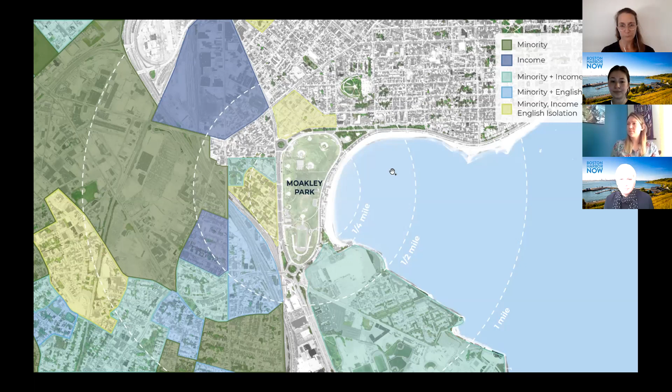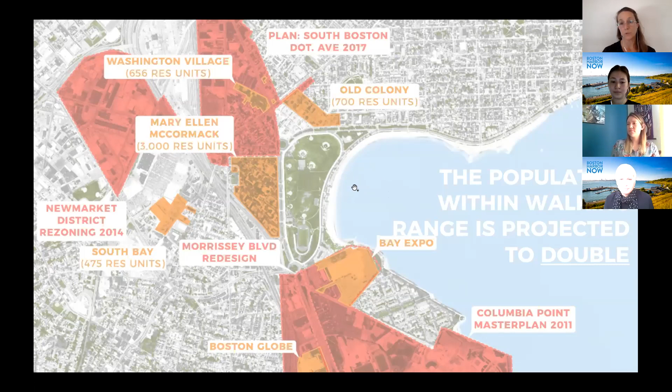In addition to this, the population surrounding Moakley Park is projected to double in the coming years as a result of a number of projects that are coming on board. So what this means is that the park itself becomes a really important future open space for all of these different populations, not only the existing population that doesn't necessarily have access to great parks, but also this increased density, which will need really great space to go to.

Equity is a really important factor as we're looking at why we are focused on Moakley as an important first step in the city of Boston's coastal flood prevention planning. Part of that has to do with those neighborhoods that I just showed you and the need for an equitable distribution of protection. In addition to that, Moakley Park is really about family and play. It's a place for communities to come together, celebrate, be with one another and get to know each other. It's about community health. Many of these neighborhoods don't necessarily have a place to engage in fitness and experience the benefits of parks, or have the ability to go to the gym or do other things that a park can offer them.

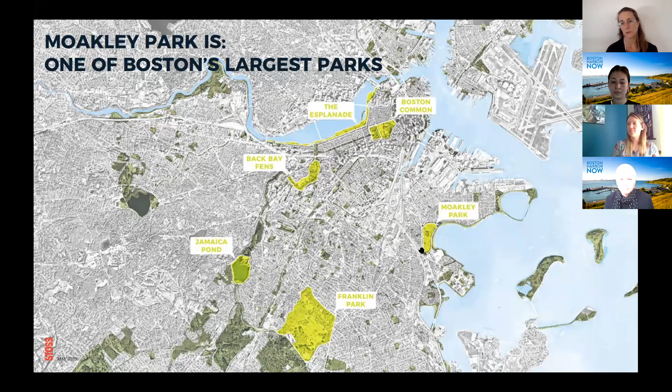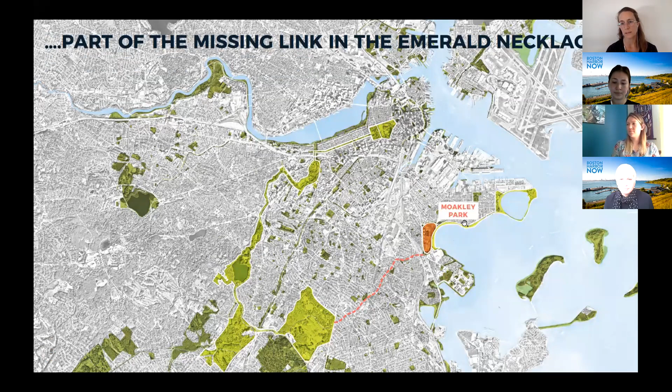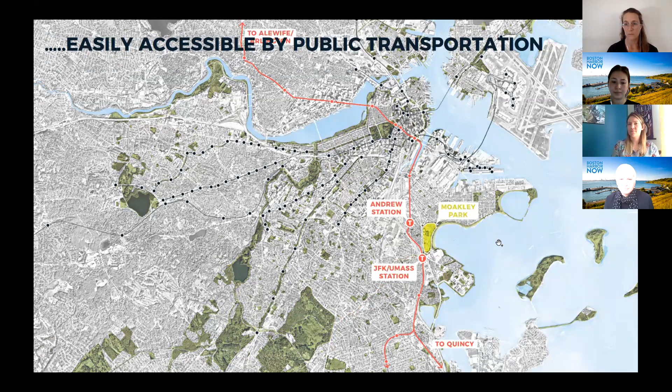So the red line is right there in a couple places, but at the same time, as you could see from that last image, while JFK Station is right there, walking from JFK Station up to Moakley Park is a relatively daunting thing to do. You have to come through K Circle, which is kind of messy for any form of transportation you might try. In addition to that, Moakley Park is isolated on either side by these 4-lane and 6-lane roadways. It's isolated from the Mary Ellen McCormack houses, which are here to the left in this image, or to the west. And it's isolated from the beach, which is right next to it, but it's difficult to know that you're right there at Moakley Park.

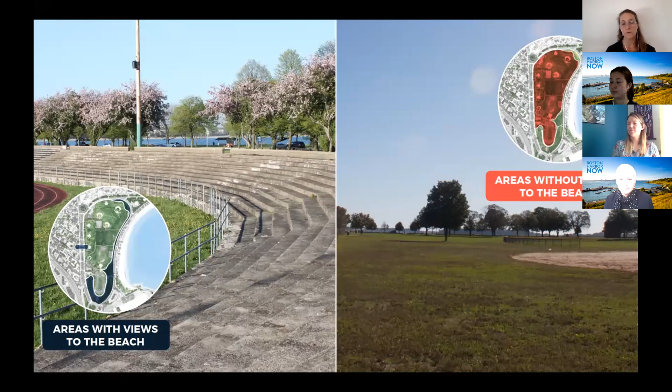As I just mentioned, there are a few places within the park where you can see that you're right there and that you're really in this gateway to the harbor. But through the majority of the park, shown in red here, you really can't see the beach, and you wouldn't really know that you're right there. So this tremendous asset of the park kind of goes missing.

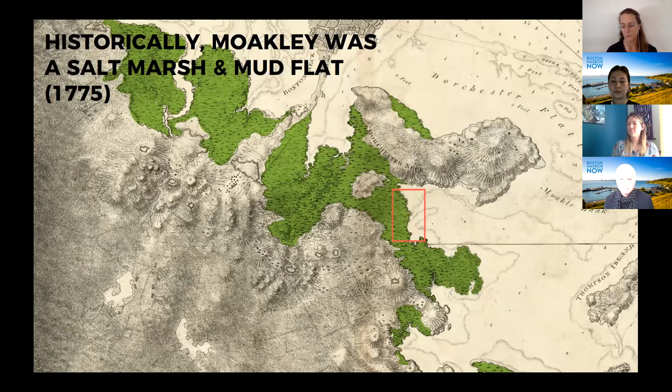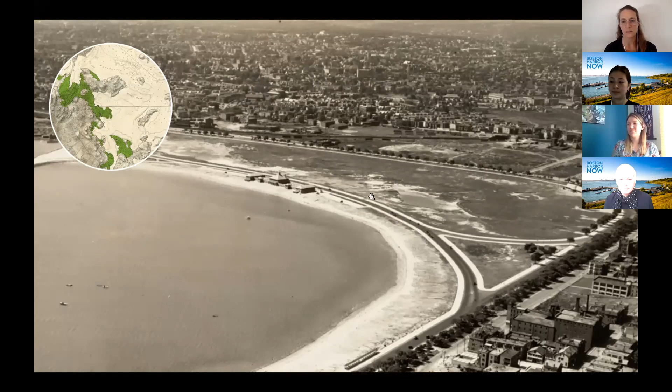Historically, Moakley was a salt marsh and a mudflat. And then in the early 1900s, it was turned into a dump and then a playground, which is generally an inadvisable sequencing of your open spaces. And then it was filled with clay and then capped with soil for the ball fields, and then eventually for the beach. What this means is that you can see today in this image, just shortly after Moakley was completed, you can kind of see the remnant of that history, right here where it's sort of the last area to get filled in.

It means that Moakley today is subject to flooding, both from high groundwater, which Julie will speak to, as well as from just stormwater. When it rains, the fields that are there flood pretty regularly. And that leads basically to a diminishing return on the program that is existing in Moakley Park. So right now, about 55% of the park is covered in sports fields, and those fields are rendered unusable when it rains. And they're flooded.

At the same time, that leaves about 43% of the park unprogrammed, really. So it's sort of space in between these fields. It's generally some lawn and some trees, and it goes sort of unused by the community. And it's really this set of conditions that led to the city of Boston in 2019 coming out with this vision for Moakley Park. So our office, in combination with One Architecture and Urbanism from New York and Nitsch Engineering, worked on this vision, which was to really create a concept for the park that would help to alleviate a number of these issues that I've just outlined.

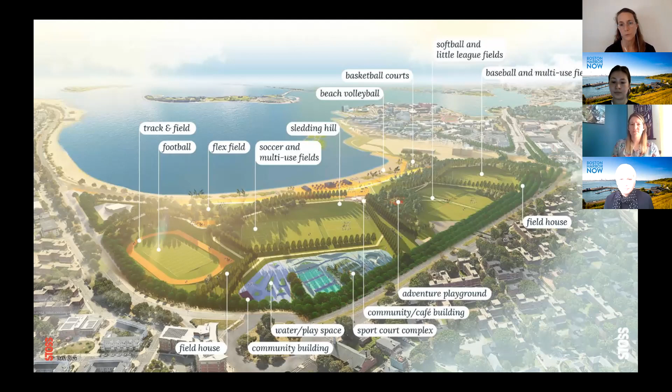It would make it more accessible, make it more inclusive, continue to improve and advance the quality of the athletic fields that are on site, and have the park act as protection against this coastal flooding that I've illustrated up front. And as well to manage some of the stormwater and generally improve the overall conditions of the park. So this is an image of the vision plan. In early 2019 we wrapped up this part of the project and put forward this plan. And we've been discussing this plan with a number of community groups.

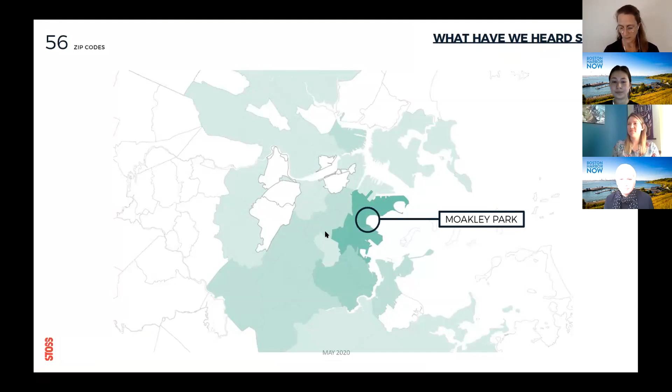What that led to was the creation of this vision plan that I showed you a minute ago. And here in plan you can see this dashed red line is a line of higher elevation where we're seeking to prevent the coastal flooding, implementing a landscaped berm that's really integrated into the park and doesn't feel so much like a wall, but really starts to be a place for new types of things to happen. And it can connect up to areas in South Boston and areas we'll hear about in a minute from Peyton, just south in Dorchester, that are raised and working to act as the protection for the city.

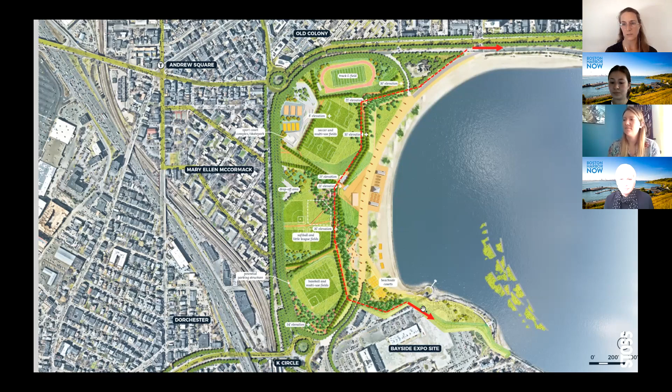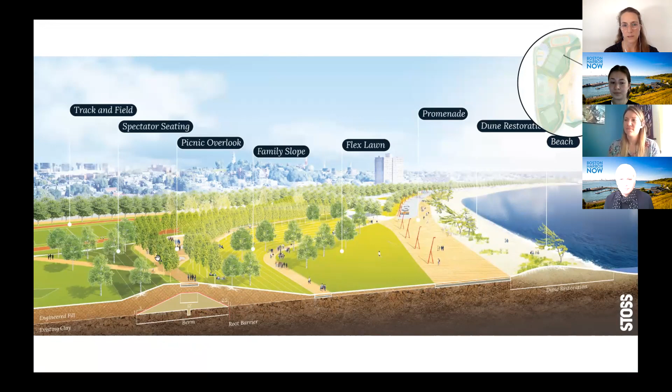This was an early idea of what that berm might look like. So you can see it here acting as a point of observation for the water, as well as an area of picnicking and things in its own right. And then when it's flooding, you can see the water coming in and being held back by that berm in a 40 inches of sea level rise on a 1% storm, which we believe to be about a 2070 timeline.

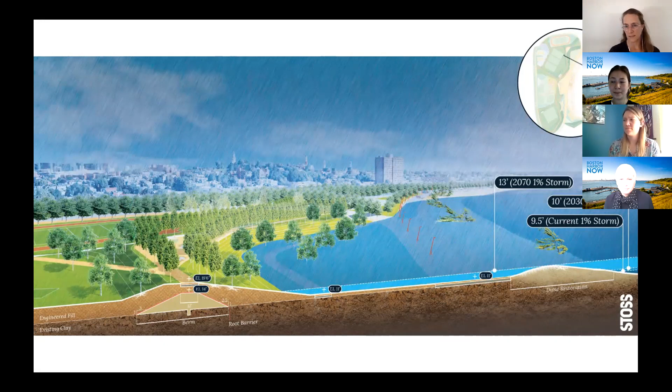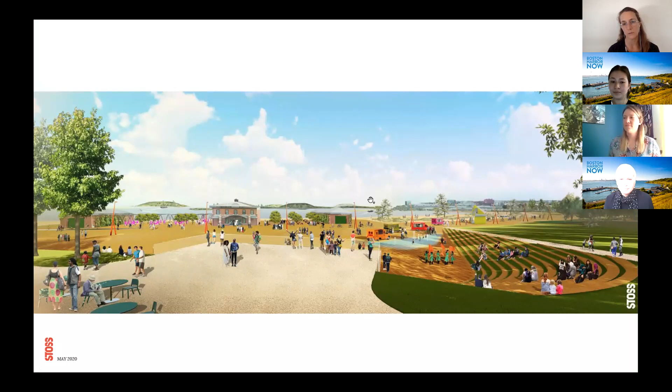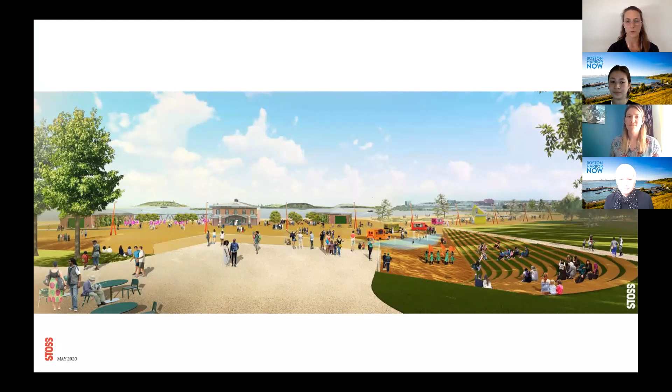You can see here again in front of this, we're sort of standing up on the top of the berm in this image and looking out over this waterfront plaza where things like events and food trucks and various things might happen. Really critical here is making that connection over to Carson Beach so people can move smoothly between the two.

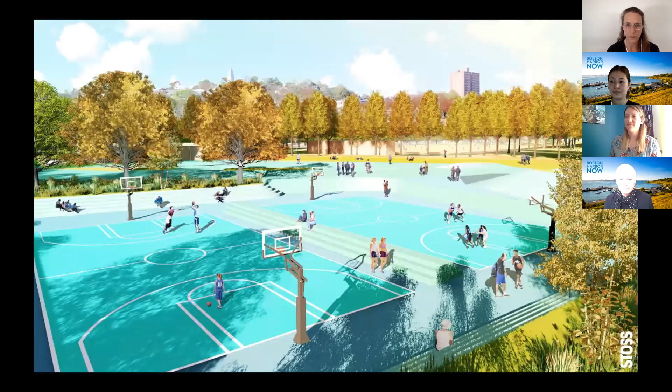And then, we're looking at implementing other forms of sport courts and that kind of thing, which not only serve as activation for different kinds of program, but could also work as flood protection from stormwater. So when it rains, these might fill up and hold excess stormwater. So all of this was the various views, a quick look basically into the vision plan, which was wrapped up.

And since we worked on the vision plan, we have been now working over about the past year with Weston and Sampson and a whole host of other engineers and designers on a refinement of this vision plan. And so I'm going to turn it over to Julie to tell you a little bit about some of the technical work that we've been doing to get more information.

Much of this vision plan was done just with community input as to what they would like to have and see in the park, but without a lot of the below ground technical information that we might need to help us really adequately locate things. So I'll give it over to Julie. Thanks, Amy.

Hi everyone, I'm Julie Eaton-Ernst with Weston and Sampson. I've had the privilege of working with STOSS for the last year on this incredible park. And so we'll talk a little bit about some of the technical considerations that have gone into the redeveloping, redesigning, advancing of this vision. So whenever we're looking at our future climate, we also like to look back to really see how climate has shaped our landscape to date.

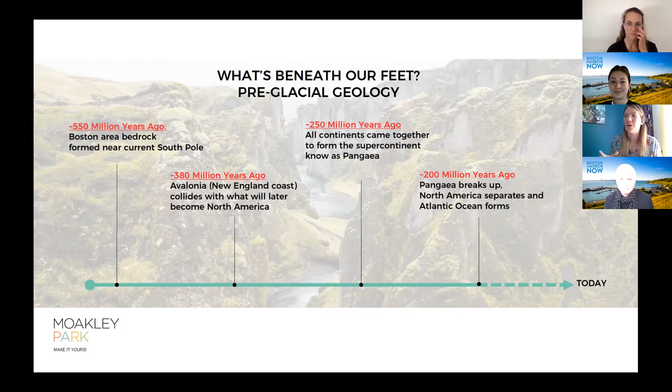So we're going to start way back when, in elementary school, you guys learned about how we were all Pangaea and the world formed and spread across. So that's sort of our pre-glacial geology, thinking about where land masses moved. Then we know that the glaciers came, and we knew the glaciers were in the Boston area, and when they left they left behind soil debris of sand, really compacted sand, gravel, and then finally deposited, clay came in. So we hear often in Boston of our Boston blue clay. So that formed in our harbor.

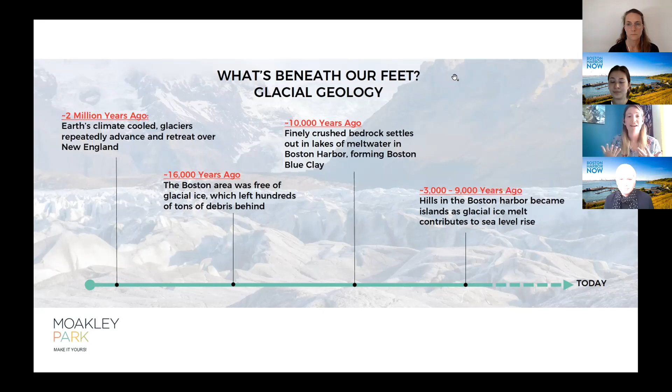And then as the glaciers melted, sea levels rose, and then we ended up with our hills being the Boston Harbor Islands, and the harbor being what we know it today. As Amy was mentioning, the area used to be a salt marsh and a mud flat, and it was filled in. So since that time of fill in the early 1900s, it's been known as a park. It used to be Columbus Park, and it was renamed to Joe Moakley Park in 2001. And that's sort of how we've known the park today.

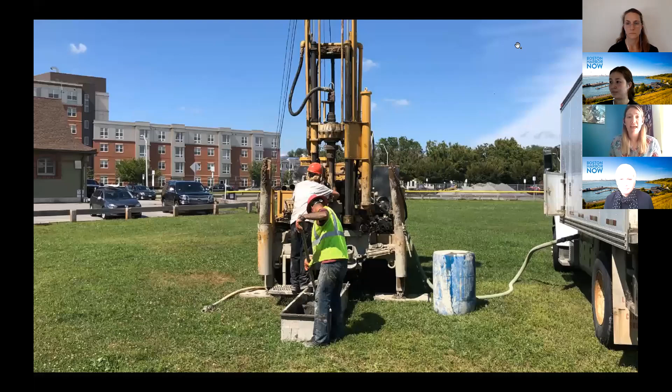So we have a great idea of what we think we're going to find on this site. We think we're going to be looking for fill materials. We know that some of it was dredged clay from the harbor. Some of it was fill from the landfill. We think because it was that mud flat, we might see organics. We're expecting to see Boston blue clay. And we're looking really for bedrock and what the quality and consistency of these materials are.

So we did a subsurface exploration program, which helped us to get little snapshots through a very large park, 62 acres, of what's below ground surface. So I'm going to ask you guys now to use your chat. And I'm curious, how deep do you think bedrock is at Moakley Park? You guys can just chat to everyone in the chat box if you have a guess. Was it 20 feet below ground surface, 40 feet, 100 feet, 400 feet? We didn't know either, which is why we did our subsurface exploration program.

Okay, we have some good guesses. We've got 20 feet, 28 feet, 70 feet, 60 feet. Any last takers? Got a 50 feet, 100 feet.

All right. Well, when we did our subsurface explorations, we found that the bedrock really varied. We saw it on the north part of the site at 67 feet, but then in the center of the site, it was over 200 feet. 224 feet was when we encountered bedrock. And then by where the stadium is, it was at 200 feet where we saw bedrock. So that was really surprising for us to see how deep the bedrock is at this site.

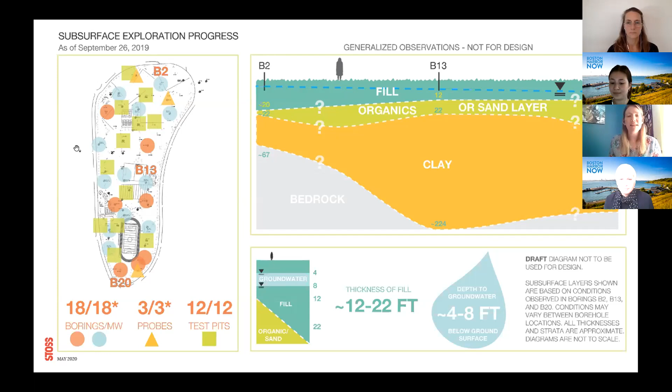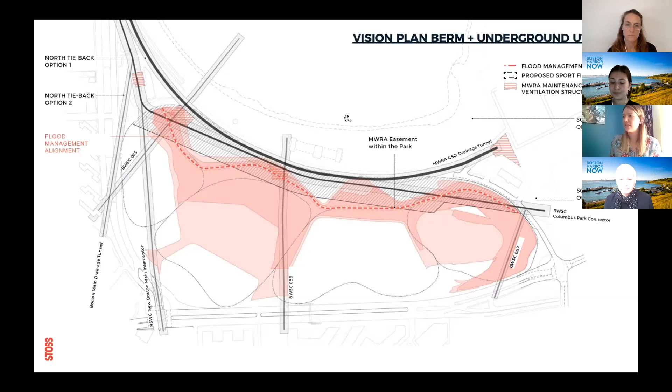So in having these investigations and understanding the utilities and what the service needs are, we were actually able to rethink how this alignment could shift back into the park and actually create more of a landscape between the barrier and the waterfront that allows for more of that open space and connection to the waterfront as well. So that was an opportunity that was realized.

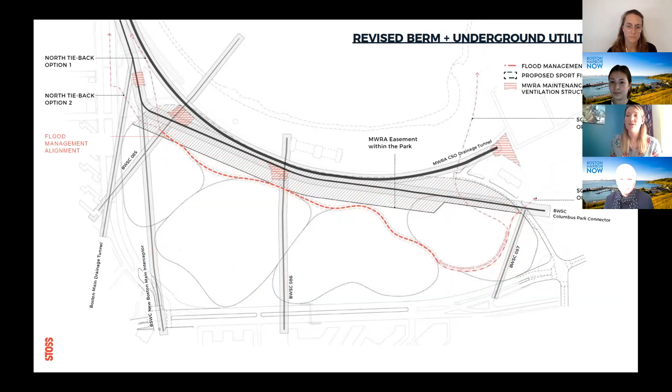We also looked at what this barrier would look like. So the original plan was to think about doing a typical earthen levee, which may have a clay core with slopes, and it looked like it was going to be about 100 feet wide with the footprint. What we realized was that by having it be entirely earthen construction, for it to go through the FEMA accreditation and Army Corps process, we couldn't have trees within 20 feet of that slope. So we would end up with these massive areas where there would be no trees.

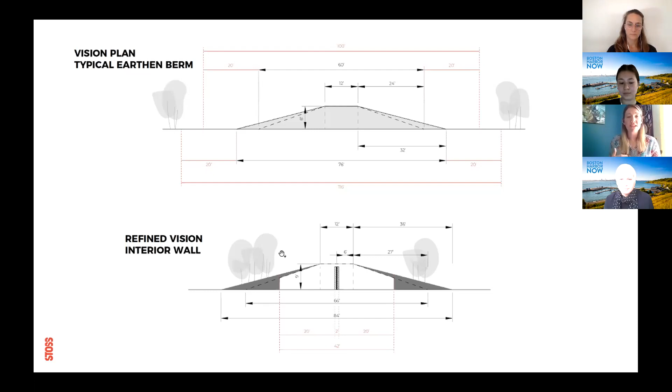So we started working with structural and geotechnical teams on, can we allow trees on the barrier? And we came up with the concept of a core wall, where the wall itself buried in the embankment is what's providing the flood protection. And then we can't have any trees within 20 feet of that wall, but it allows it to become a more vegetated slope. And also really thinking about what are the opportunities with this wall, and how the earthen form is no longer responsible for flood protection, so it can really start to take some programmatic functions and shapes. And I'll have Amy talk a little bit to some of those concepts of how we played around with the wall.

Great. So this is kind of the form of that original earthen berm and the type of program we were looking at, for the most part, adjacent to it, where we have low slopes, things where we can have spectators sitting and watching, but largely it's not that diverse in terms of what can happen along that berm.

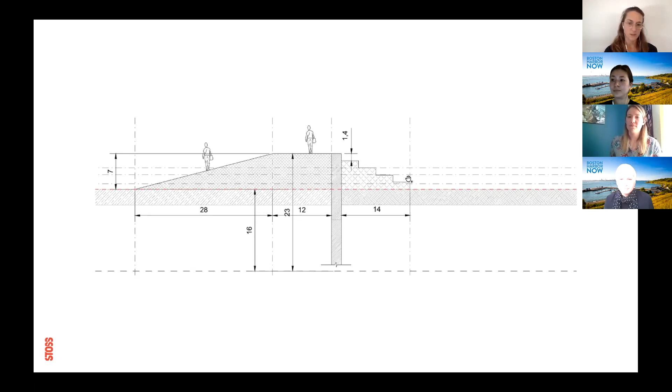Here with this new wall concept, which you can see here in the middle, we can still have that same kind of shape we had before, but we also can start to build in different types of adjacent relationships. So here we've got that berm relationship on one side, but then we might have a set of stairs, and those could be standard steps that allow someone to go down, or those could be more like stadium seating that allows us to create an amphitheater. A place to sit and watch the water.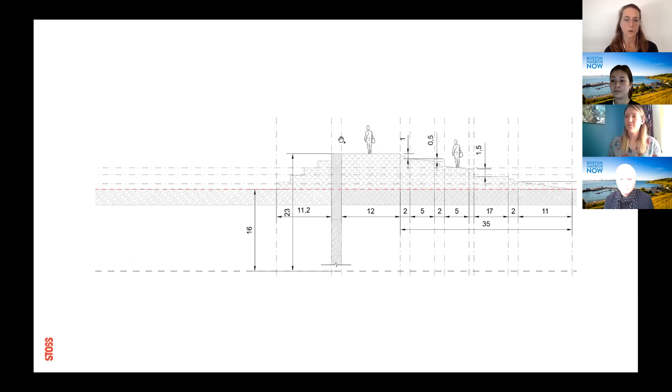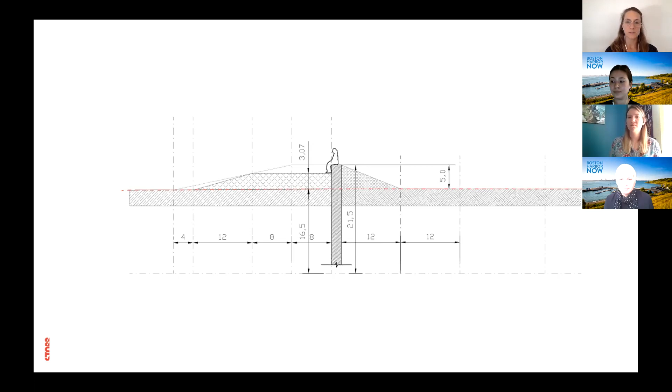Or in some places, we may even let the wall kind of peek up and express itself and become part of a seating element, either just the wall itself or something that gets built onto that wall to create a design element that both is acting as flood protection, but is also starting to let people engage with the park in new ways.

I'll just add, the benefit also of the wall is that we can design it to be added to in the future. So it allows us flexibility if needed to be able to raise the wall if we need additional height and protection in the future. And that's a benefit that we see as well in having that structural element.

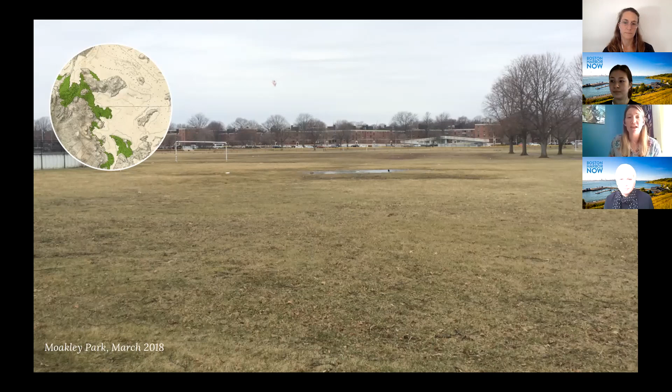The other things we've talked about, the berm being in coastal defenses, but we're also considering the stormwater, groundwater, and heat implications on the site. So as Amy mentioned, the park is wet in areas where there's high groundwater and where stormwater has trouble draining. So really working with Nitsch Engineering on selection of green infrastructure strategies to do creative stormwater management on the site, and also creating that tree canopy that will really mitigate the urban heat island effects and have a lot of improved air quality and just overall quality of life.

Great. So we are really excited to get to reveal to you a lot of the new design for the park, the updated design that accommodates all of this new information we've been learning, as well as all the great feedback we've gotten from the community over the past year. But we can't do it yet. We're going through final design in the next month or so of this stage, and then it'll go through some review, and hopefully in August or September of this year, we'll be able to have an open house.

We hope that open house can be in person in some way, to be determined as we see how things go. But we really look forward to sharing more with you all at that time and getting your input on all the great changes that have happened in the park. And then we're also looking to continue working and starting to focus in on a phase 1 that will hopefully begin design on right after that open house time.

So with that, I want to open it up for just a few minutes, maybe 5 minutes or so of questions from any of you. I know we have some Moakley Park experts in the crowd, I noticed, so no tough questions, please. But we're happy to answer any questions you might have, about the design, about the park, whatever you might be interested in. I think probably chat is the best way to do that. Yeah, Lily? So just drop your question in the chat box if you've got one. Looks like we might be fresh out. Okay, great.

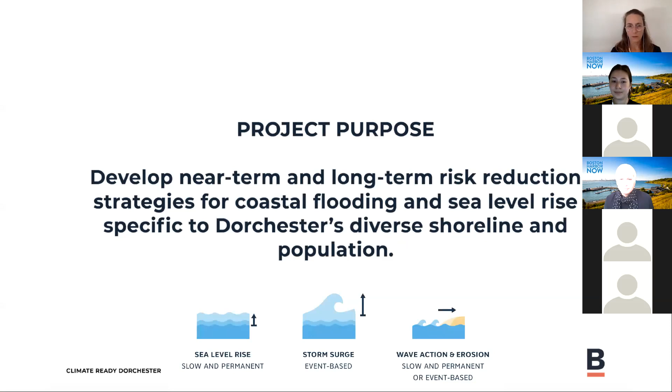So in addition to the really critically important and central resilience goals, we're also thinking about other citywide goals. So how do we enhance access to mobility, promote health of ecosystems in the neighborhood, and really define the identity of the coastline through the neighborhood. We've come to think of this as the Dorchester Shoreway.

Next slide. So you can see here the project area as a whole, obviously the entire neighborhood. And then on the east side, you can kind of see where we expect to see flooding over time. So where we see flooding today and where we expect to see flooding in 2070. Next slide.

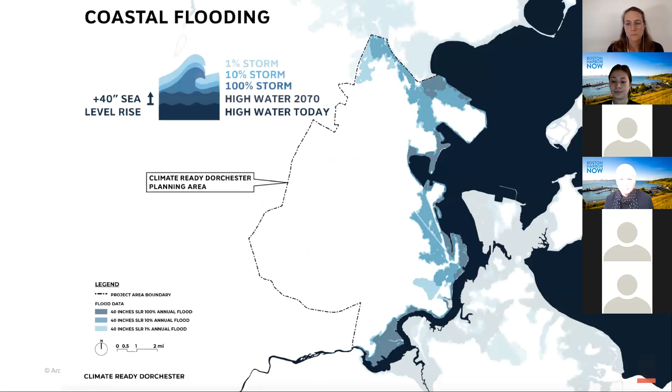So as Amy mentioned, one of the key flood inundation pathways into the neighborhood is right along the southern edge of the Moakley Park project. So we called it the Bayside Pathway. And another critical flood pathway into the neighborhood is the North Morrissey pathway. So I'm going to briefly touch on our proposed design solutions for both of those pathways.

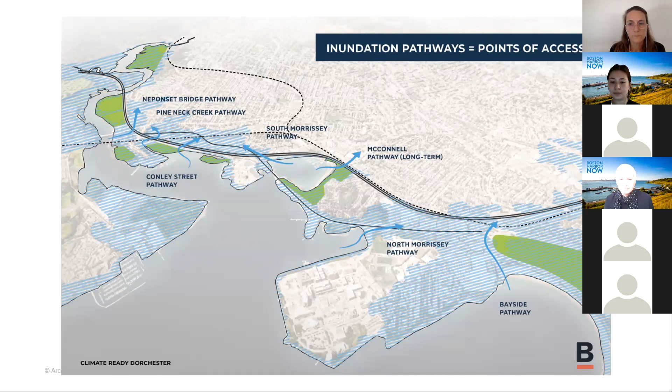Next slide. So throughout the Climate Ready Dorchester planning process, we connected regularly with the Moakley Park team as well as the Bayside redevelopment team. So the Moakley Park berm that we've been talking about runs obviously through the park, and then really close to it, there's the Bayside redevelopment, which is thinking a lot about integrating flood protection, but there's this small gap.

So what we need here is an integrated flood protection system, and we're thinking of essentially connecting the berm at Moakley Park to the Bayside redevelopment, so blocking off that flood pathway. And then past the Bayside redevelopment, we have a raised harbor walk, which ties into high ground at the University of Massachusetts. So then if we zoom into the Morrissey pathway, next slide,

you can see, so basically we presented, I don't know, is there a next slide, Carly? Yeah, it doesn't look like there actually is. It goes straight into my presentation.

Okay, so the little box in the top left, the report essentially presents two options for this focus area of the neighborhood. One is looking at the raising of Morrissey Boulevard, and then the alternative, the less preferred option, is adding a harbor walk to the eastern edge of Morrissey to protect the neighborhood. Both options present a near-term and long-term solution at the Savin Hill and Patton Cove gap.

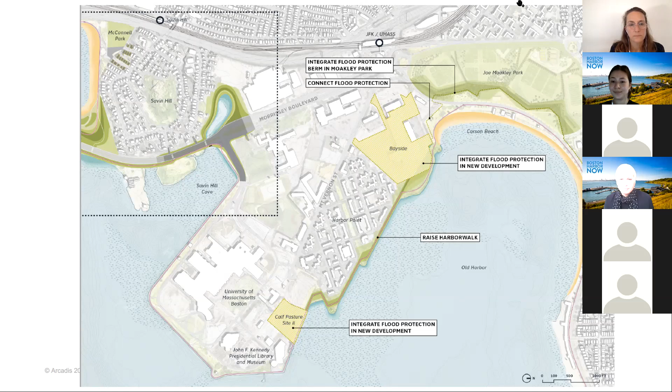You've all been hearing about some pretty incredible concepts and designs in coastal flood risk resilience. And I'm going to switch gears a little bit to talk about implementation. So last summer, we began working with the city stakeholders and the Boston Green Ribbon Commission to tackle some key questions about how the city could implement the significant coastal resilience actions that have been planned over the last 3 years and how that could be done in the absence of major federal funding, because we're not sure whether it would be available.

So the results of that study are now published. They're on the Boston Green Ribbon Commission website, and the link to that is at the back of this presentation. It's called Expanding Boston's Capacity to Build Coastal Resilience Infrastructure, Lessons from the Seaport District. And it uses Climate Ready South Boston as sort of the study area.

So this slide just sort of provides a refresh or recap on how busy the city's been over the course of the last 3 to 4 years. And so that study builds on the work that's been completed so far through Climate Ready Boston, through the district level plans, through various studies in finance and governance and guidelines that have been developed.

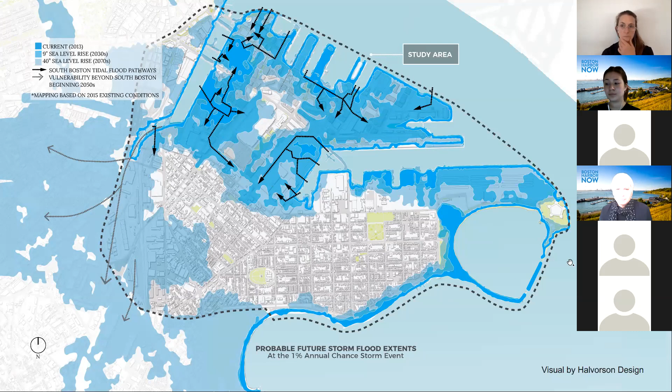So, you know, we talk a lot about engagement when we're developing solutions, and our basic philosophy is that it needs to result in some change in all parties involved, educating, guiding, with various perspectives and the information that's shared. And when we're structuring engagement, we always ask these 4 questions: who could affect the project process, who could be affected by the process, who could affect project outcomes, and who could be affected by outcomes.

And implementation is really relevant to all 4 of those, but especially question 3. And so we created focus groups related to critical issues that would need to be resolved for implementation. So I talked about collective action being needed across property owners.

So we formed geographic focus groups so that the property owners could get to know one another and be part of the solution from the beginning of the planning process, building trust and understanding what possible impediments there might be, knowing that they're going to have designs that interconnect. Regulatory and permitting focus groups.

I mentioned earlier that there was a potential for regulatory and permitting challenges just due to the basic structure of the area. And then, of course, funding and financing focus groups.

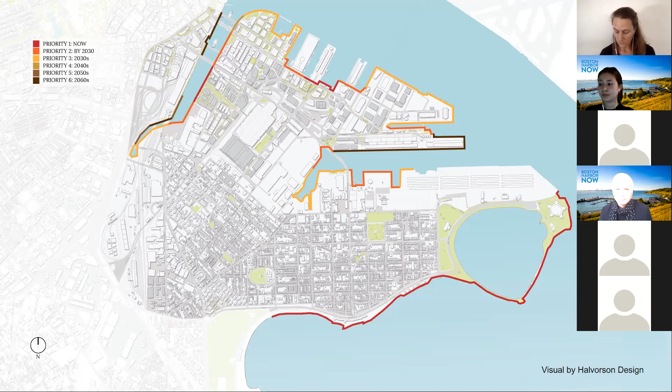And so in order to make that a little bit less daunting, there are 3 possible implementation tracks. There are partnerships that can be leveraged to implement the solutions neighborhood-wide, and they actually fall pretty neatly into various geographies. So they can move forward in parallel.

So track 1 is comprised mostly of private property owners, different property owners at even the parcel level marching up Fort Point Channel. Track 2 is dominated by Massport ownership and Massport tenants and maritime uses. And then track 3 is dominated by the state ownership and DCR. And track 4 is really about policies, programs, regulatory solutions to flood risk in the area.

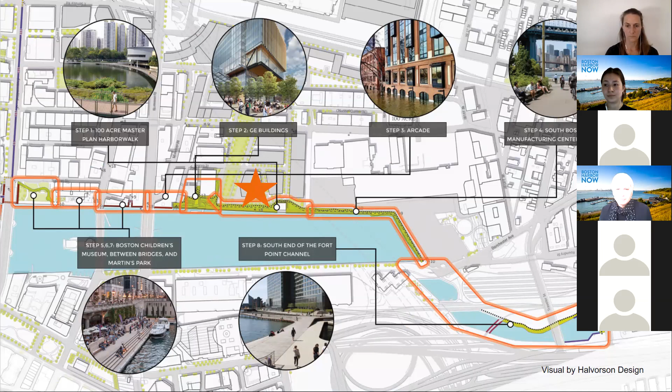Here's a quick zoom into that area. And you can see that you can even, based on flood risk, determine how you might do this on a step-by-step process at the parcel level, keeping in mind if you were going to do this in a piecemeal fashion, that each of these properties have to be tied together to form an unbroken line of defense.

So 2 of the highest risk areas of the neighborhood are... I'm wondering if everybody can see that when it keeps popping in.

2 of the highest risk areas in the neighborhood are along Fort Point Channel and Seaport Boulevard, and that's where we focused the study in coordination with the Green Ribbon Commission, with Bud Ris and John Cleveland, who were fantastic through that whole process.

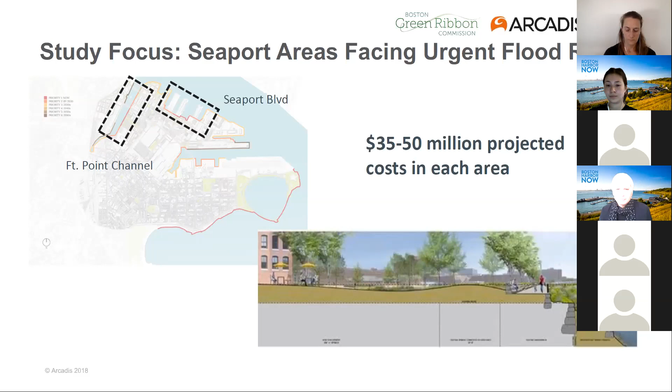And the study was really 3-pronged in nature, using desktop research, background analysis and research, literature reviews, case studies of how these things are being done in other parts of the country and globally, detailed investigations of various implementation and project delivery processes,

engagement with, because we were focused on the most urgent action areas, we were focusing this on engagement of the folks that would have control over those properties, that we would need their buy-in in order to move forward. Also with city leadership and bouncing concepts off of the Green Ribbon Commission to see how things would be interpreted and feasibility of different concepts.

And then as we were moving through recommendation development, we focused on governance, funding, and policy recommendations. We also did an investigation into cost share analysis. So this concept of, who should be paying for what, when, how, and what could that look like? And we came up with a dual policy track framework, and I'll talk about that in just a moment.